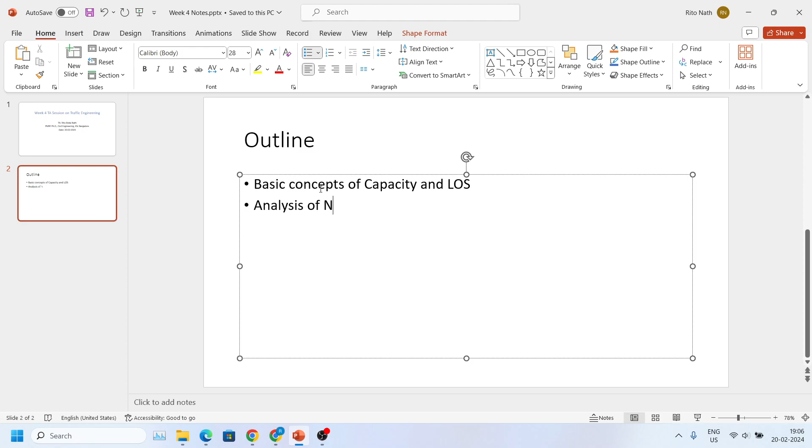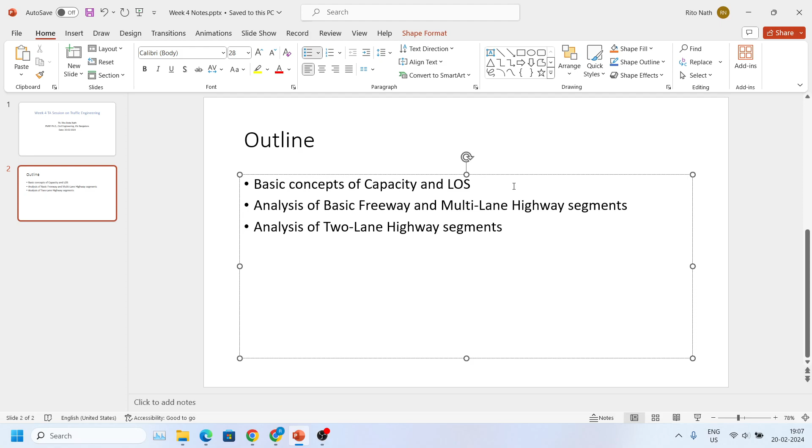First let me write down the outline of today's discussion, which is on capacity and level of service. Basic concepts of capacity and LOS, then what was discussed in class was analysis of basic freeway and multi-lane highway segments. Within that you have some speed flow relationships, operational and analysis applications - we'll see some of those. Finally, the analysis of two-lane highway segments, which was discussed very briefly, and the remaining discussion will be done in next week's sessions. So these are the basic topics I'll be discussing today.

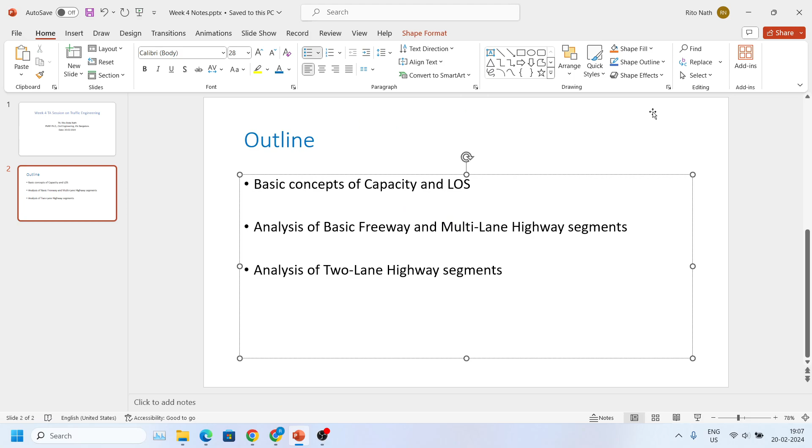Let's get started with the discussion on basic concepts of capacity and LOS. Now if I ask you this basic question: what do you mean by the term capacity analysis, which was discussed in the initial stages of the sessions shared on this website. Then you have something called level of service analysis. Let's try to see what these are and what their differences are.

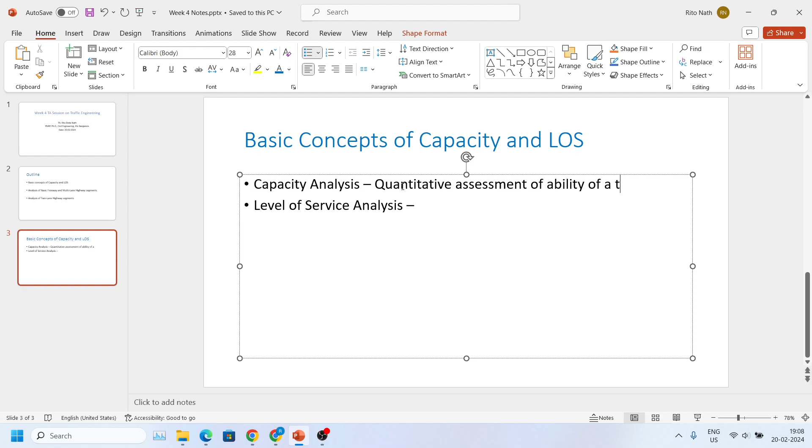Capacity analysis essentially means a quantitative assessment of the ability of a traffic facility to handle vehicles or people. Here we'll be looking at vehicles only, so it's in terms of vehicles in general.

And then you have something called level of service, which tries to tell you some performance level of a traffic system at various operating conditions. Now how good this operation of a traffic facility is, is what this LOS kind of tells you. So this is not a quantitative analysis, but it explains it through some qualitative analysis.

Now if I move into the discussion, just to understand the basic differences I've talked about here, this has been discussed in class as well. The traffic stream is composed of different modes, and different modes have different effects on the traffic stream. There can be cars, heavy trucks, light trucks, some recreational vehicles, buses, and pedestrians, bicycles, and so on.

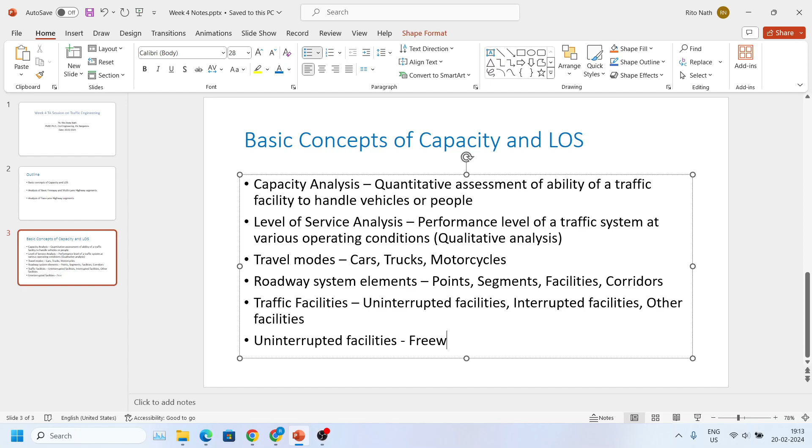Now the discussion in this week's lectures was on uninterrupted facilities, and these consist of freeways, which is basic freeways. Then you have multi-lane or two-lane highways as well.

Or you can have two-lane highways.

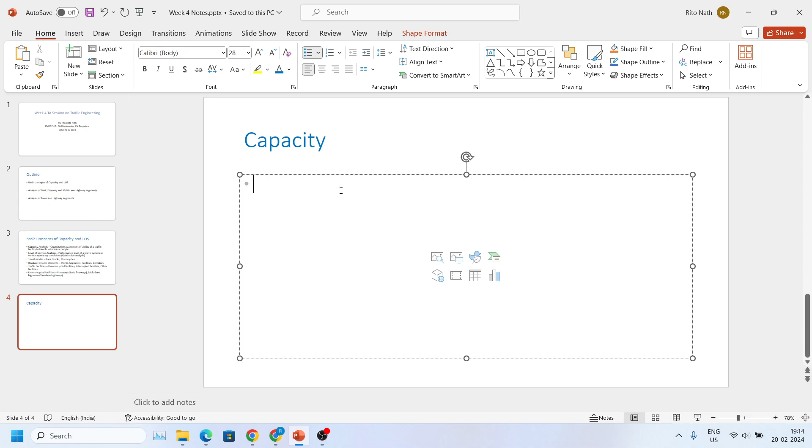Now the discussion was on capacity and mainly its definition. Capacity is defined as a maximum hourly rate, and the reason this maximum hourly rate is chosen, specifically the peak 15 minutes of flow, is because you have some steady or uniform situation on the road where you take care of all the heterogeneities in terms of travel modes and other things.

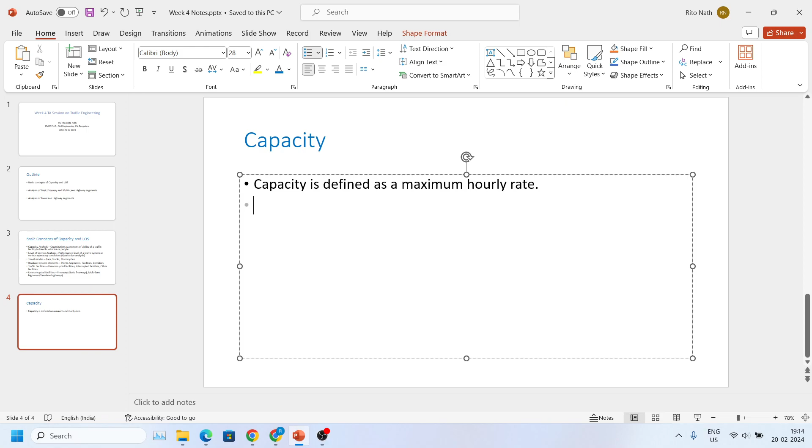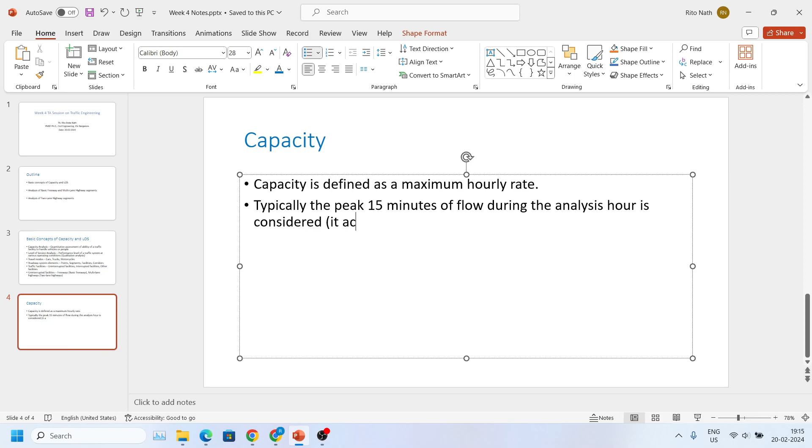So to define it, the peak 15 minutes of flow during the analysis hour is considered, and this peak 15-minute flow rate accommodates nearly all the variations in flow during the hour.

Capacity is expressed in terms of persons or vehicles. Person capacity is used in public transit systems and so on, but here the discussion is only on vehicles.

Another important pointer is that capacity is defined for a point or a uniform section, and this uniformity of the section being analyzed is an important criteria.

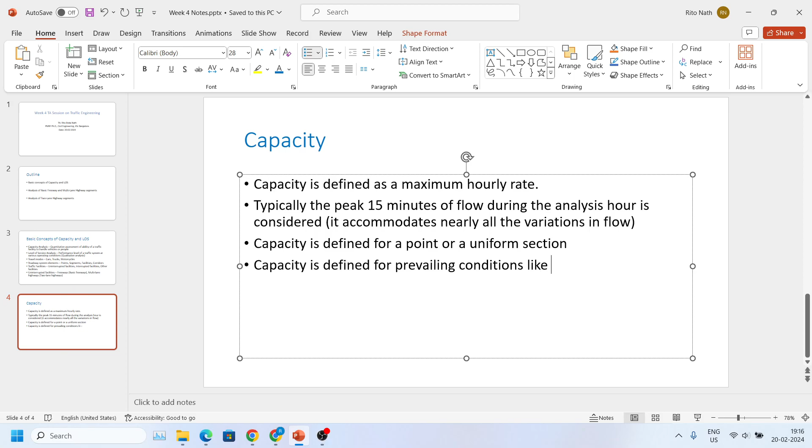Capacity is also defined for prevailing conditions like roadway, traffic, control operations, or environment, and we'll see what the base cases are and how adjustments are needed according to variations in these conditions.

Let's look at these conditions one by one. First, roadway conditions, which include the geometric and other elements, like number of lanes, lane widths, and design speed. There are many others, but let's just note these for now.

Then you have traffic conditions, which can be vehicle type, directional distribution or lane distribution, and driver population, like how familiar the drivers are with driving in those conditions.

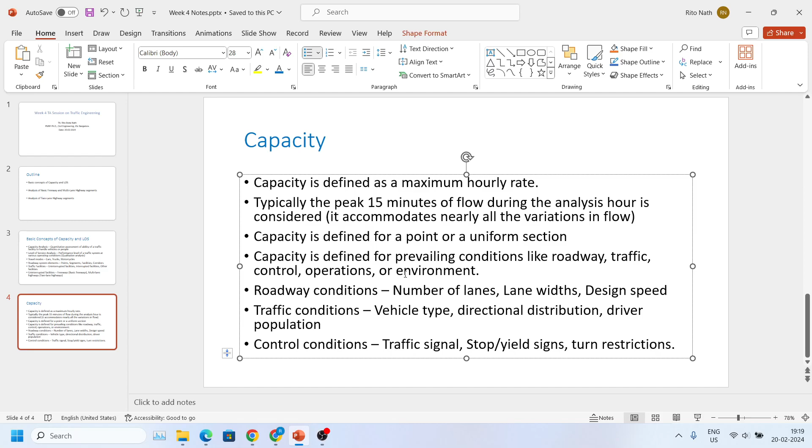The last one is environmental conditions - a traffic facility's capacity can be reduced depending on environmental factors like heavy precipitation, snowfall, lighting conditions, slippery road surfaces, and so on. But we will be only focused on the base conditions, so let's look at those now.

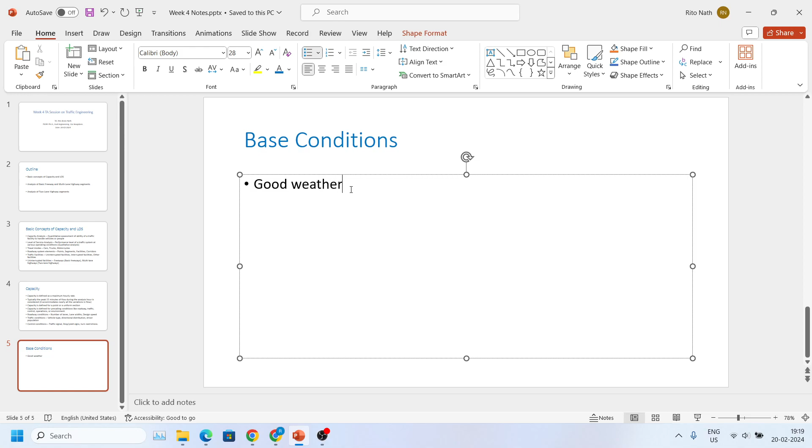In base conditions, we have good weather - precipitation and those things should not be present. Good and dry pavement condition, no slippery surfaces. Then users are familiar, based on the driver population I mentioned with the system element.

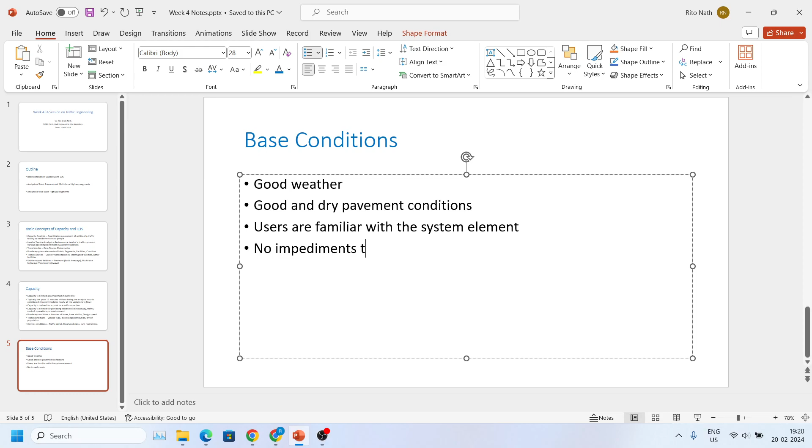And then there are no impediments to traffic flow conditions, like no slow moving trucks entering the traffic stream. And also no narrow lanes, like a 3-lane road merging to a 2-lane road - that's not allowed here.

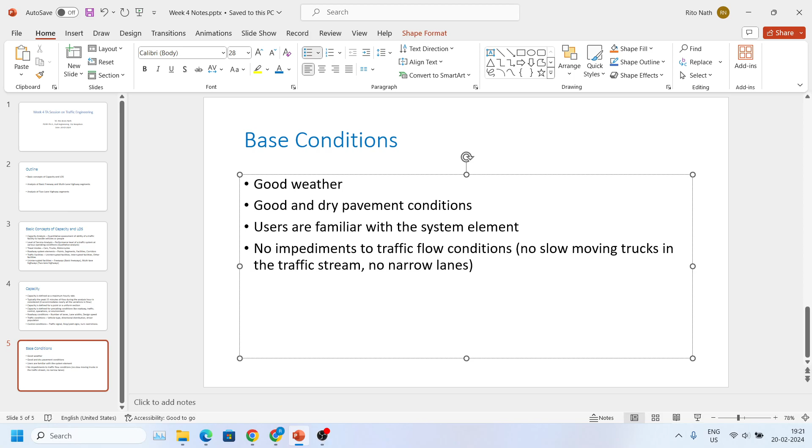In most capacity analysis, finding the roadway capacity, these prevailing conditions differ from the base conditions defined here, meaning you need some sort of adjustments. So prevailing conditions are different from base conditions in most cases, hence necessary adjustments are required to calculate capacity.

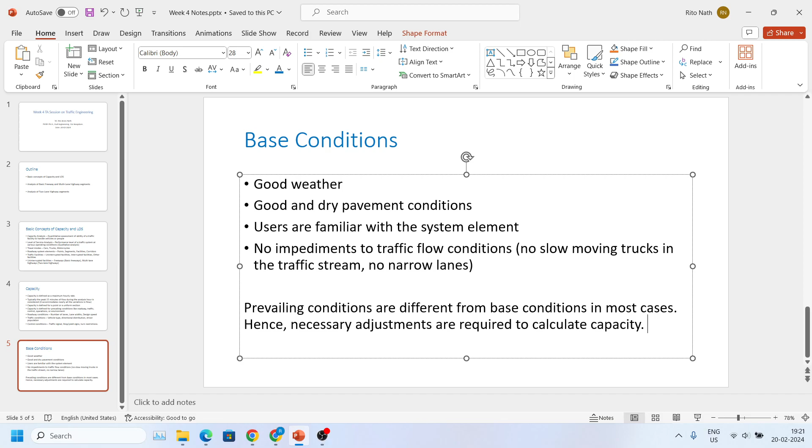Next, the discussion was on level of service, the basic concepts. So let's get into that.

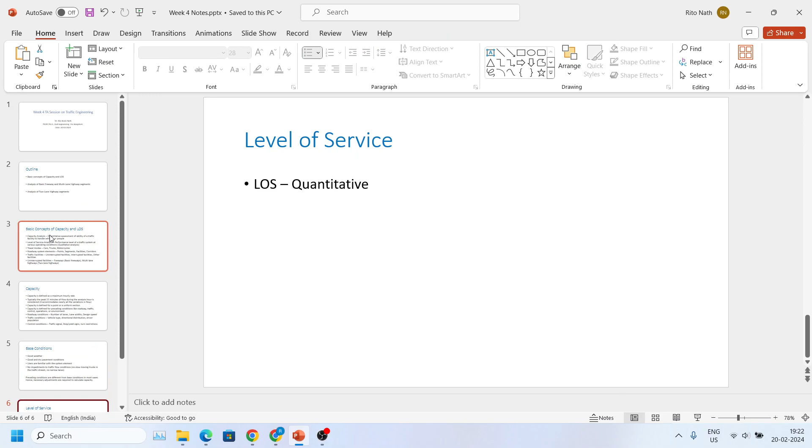So for level of service, I have already mentioned this LOS is a quantitative... I think I mentioned it as performance level. So this performance level is kind of some qualitative measure, but actually if you are doing it, you are quantifying something, suppose some density, speed and flows and so on. So actually it's wrong to say it as a qualitative analysis, it's also quantifying something. Let me just not write it here, and you can think of it as some quantitative analysis.

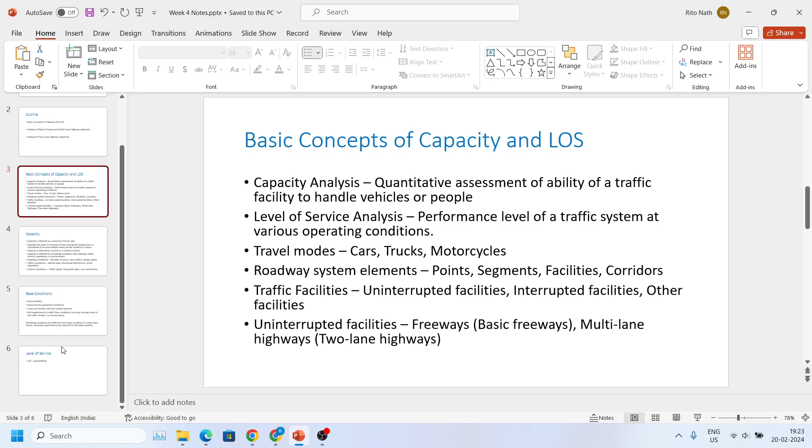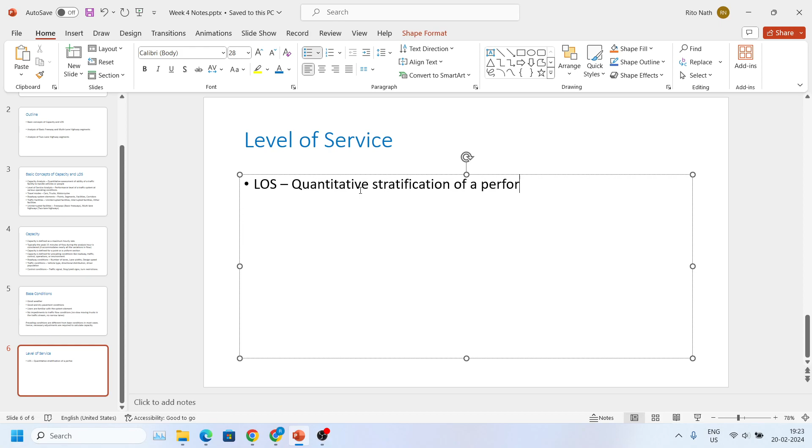So LOS is actually a quantitative stratification of a performance measure representing quality of service, and this quality of service term is some qualitative term you can think of, which tells you how well a traffic facility or service operates from the traveler's perspective. And the traveler's perspective can be different from one traveler to another, so that's why you cannot quantify it as such.

Now this LOS is typically given from level A, which is best, to level F, which is the worst. And this LOS for a given mode on a given transportation system element is defined by one or more kind of service measures. So we'll see what these measures are, but let's first see how you can define this quality of service.

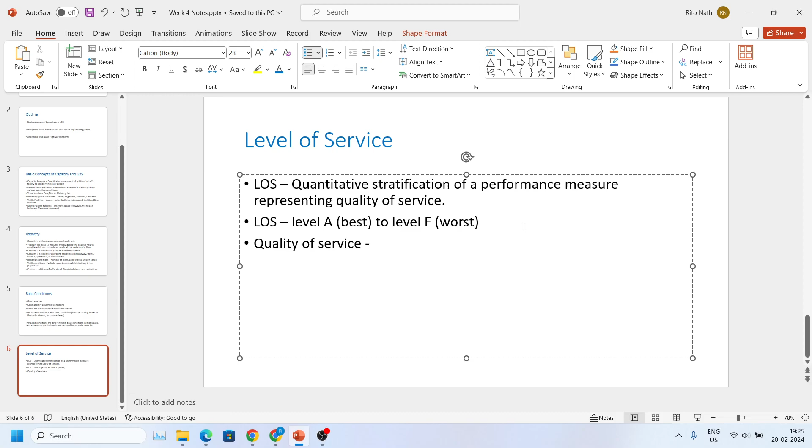So this quality of service is defined, as I mentioned, by how well this transportation facility is running. Now this can be assessed by some directly observing factors that are important to travelers, like speed, delay, tracking some complaints from the users, or you can survey travelers. Then you can forecast traveler satisfaction, and then you can observe some services not directly perceivable by travelers, some average incident clearance time, and speed and arrival time at work, those things. But I think if you just understand this first few points, that should be enough.

And now there are several factors that influence this quality of service: travel time, speed, delay, reliability, comfort, convenience, safety. So some basic stuff that travelers do care about. Cost, then accessibility to some facilities and so on. So these things, I think you should have some idea about how this quality of service is important.

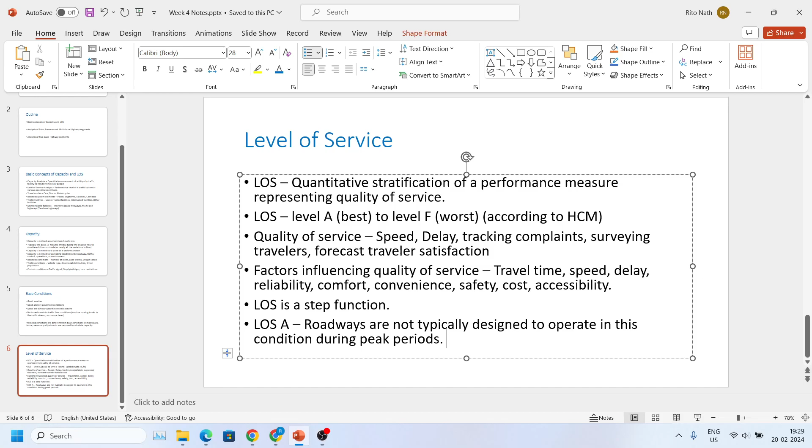And LOS F is, if you look at it, either a breakdown condition where demand exceeds capacity, or most users would consider the system to be unsatisfactory for some specified service measure. So LOS F represents this breakdown condition where demand exceeds capacity.

So now let me see what can be discussed. I think in this context there is some discussion on service measures. It is mentioned that each mode's travelers have different perspectives and could experience different conditions while traveling along a given roadway. So the service measures are also different for different modes and facilities, like for motorized vehicles, pedestrians might have different experiences, or bicycle users might have different experiences, as well as transit users.

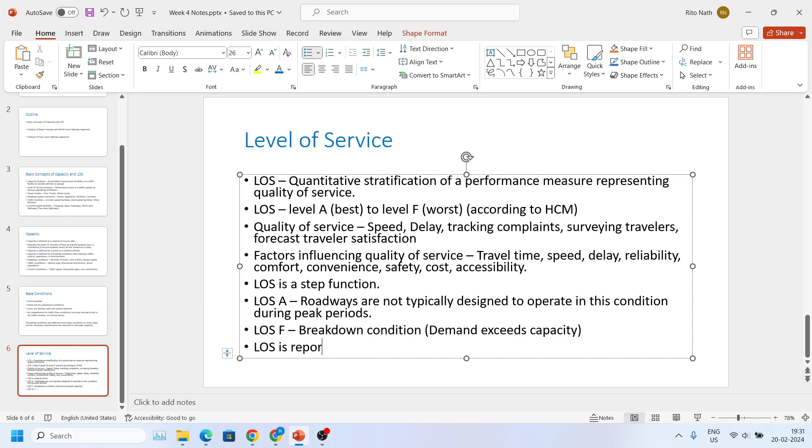So it depends. In theory, this LOS and everything should be reported separately for each mode for a given system element. So LOS is actually reported separately for each mode for a given system element.

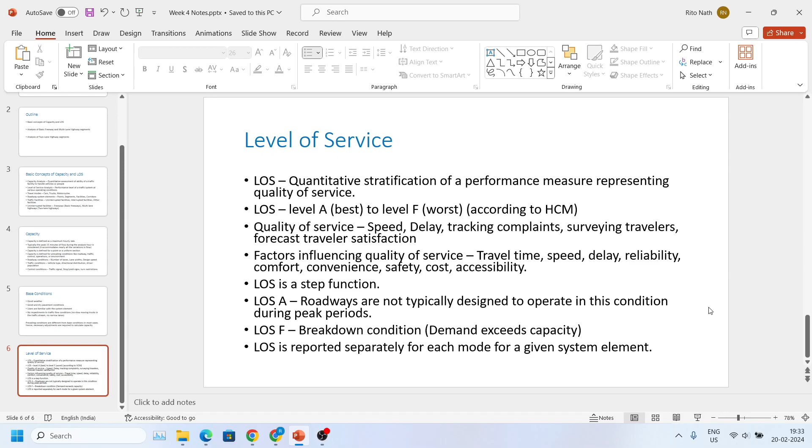So these are kind of basic concepts of this capacity and LOS. And I think then in the next module there were more discussions on prevailing and base conditions, some influencing factors, and so on, or a discussion on flow characteristics, like some pre-breakdown flow rate, post-breakdown flow rates, and those things. So let me quickly discuss those and then get into the quantitative analysis of this level of service. So the next discussion is, as I mentioned, we'll be looking at uninterrupted flow facilities as well as basic freeways and multi-lane highways. So let's get into that discussion.

Okay, so here we can distinguish between these two. Basic freeways are access controlled facilities. These have grade separated cross streets and ramp movements to access the facilities and so on.

Then you have multi-lane highways, which have some uninterrupted flow that kind of exists. There are no control devices, no platoons formed by upstream traffic signals. So these have no traffic control devices and no platoon forming.

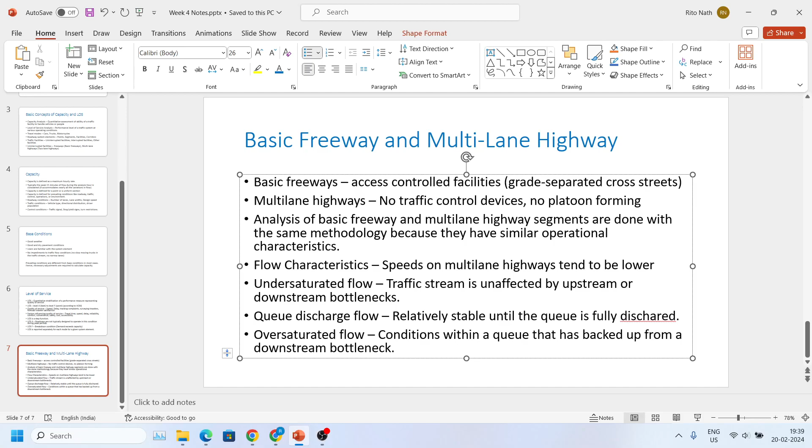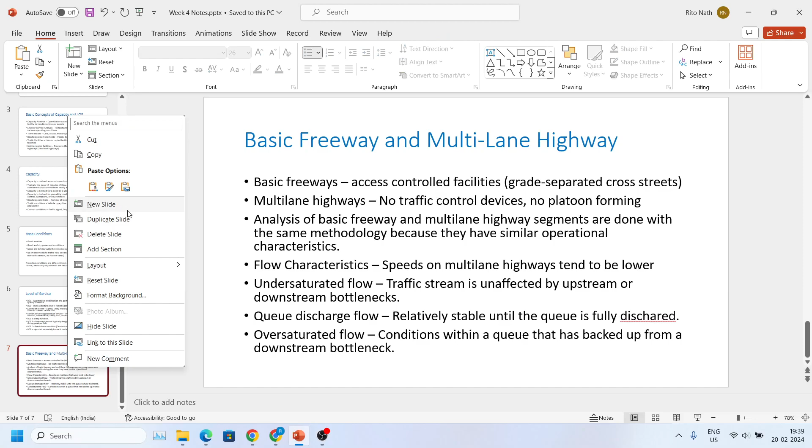Then there are some other terms that have been defined in the class. One is freeway breakdown. Let's quickly discuss those, and then I'll move on to the assignment questions. So this is on flow characteristics.

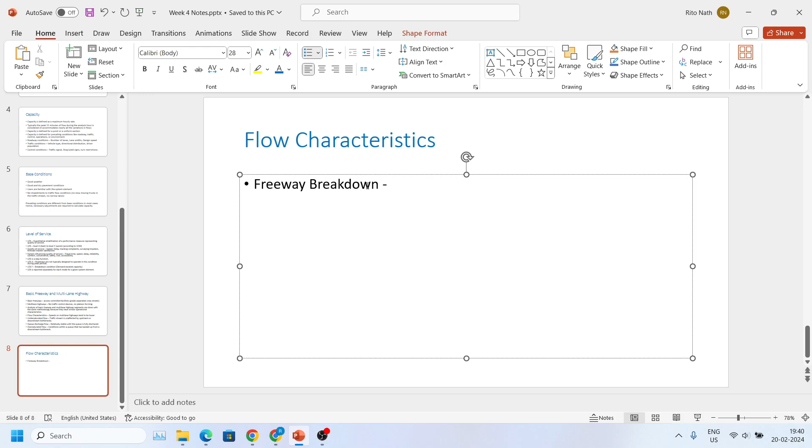One is called freeway breakdown. This describes the transition from uncongested to congested conditions. It tells you about formations of queue upstream of the bottleneck, and therefore the reduced prevailing speeds make the breakdown evident.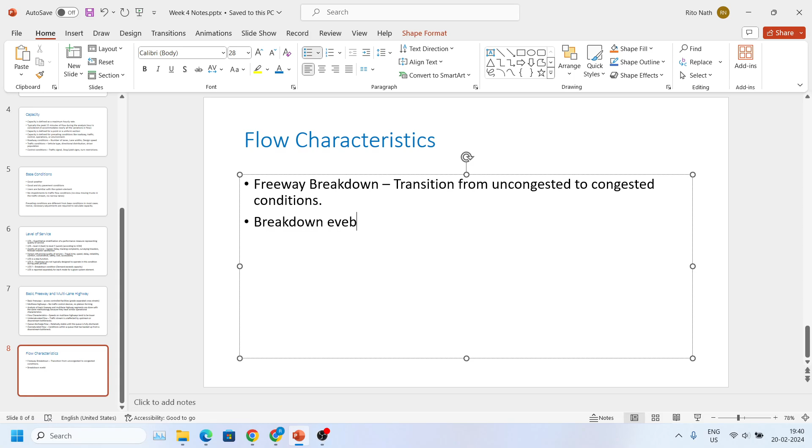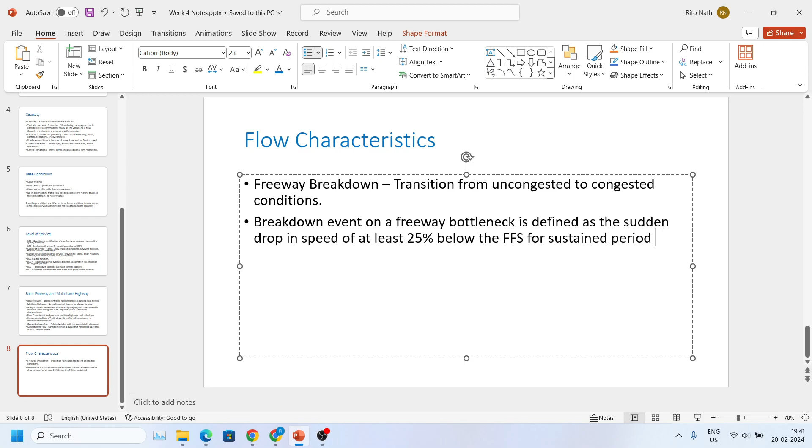Now there is one important term defined here. A breakdown event on a freeway bottleneck is defined as the sudden drop in speed of at least 25% below the free flowing speed, which I write as FFS, for a sustained period of at least 15 minutes, that results in queuing upstream of the bottleneck. This definition is according to the Highway Capacity Manual 2016.

Okay, so the next term defined is called recovery. So you had a breakdown condition. Now this recovery is actually the inverse of breakdown, and there is again one term defined as breakdown recovery on a freeway bottleneck.

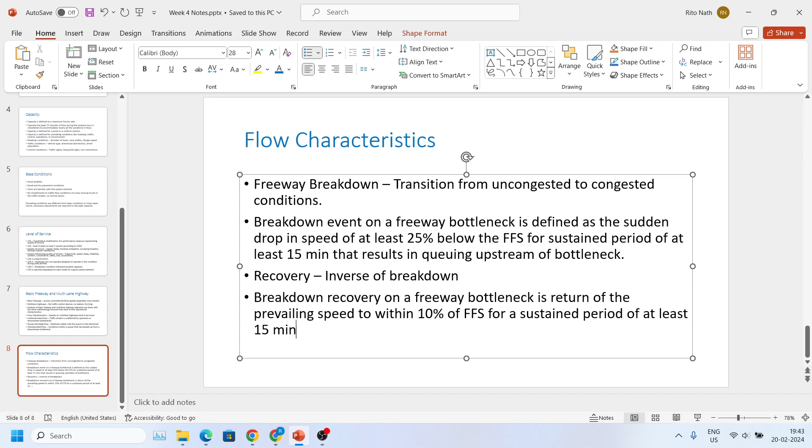It is the return of the prevailing speed to within 10% of free flow speed for, again, the same definition, a sustained period of at least 15 minutes, without the presence of queuing upstream of the bottleneck.

Okay, then there is something called pre-breakdown flow rate and post-breakdown flow rate. Let me just quickly write these terms and then I'll probably talk about it briefly.

So, pre-breakdown flow rate is the flow rate that immediately precedes the occurrence of a breakdown event, and this is expressed in terms of passenger car units per hour per lane.

And the post-breakdown flow rate can also be called the queue discharge flow rate or average discharge flow rate.

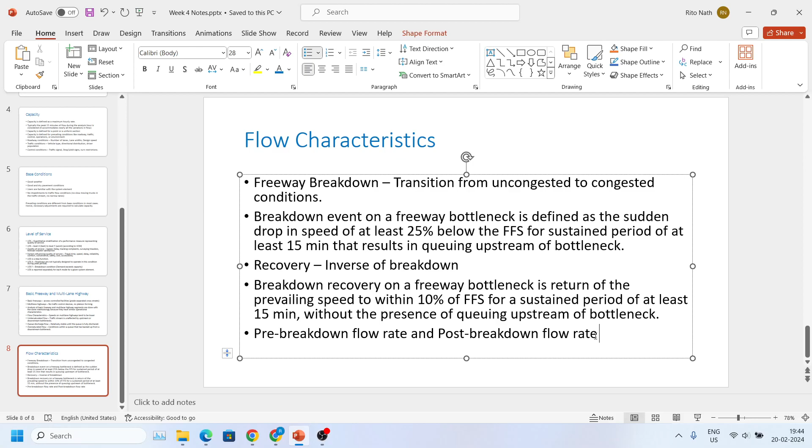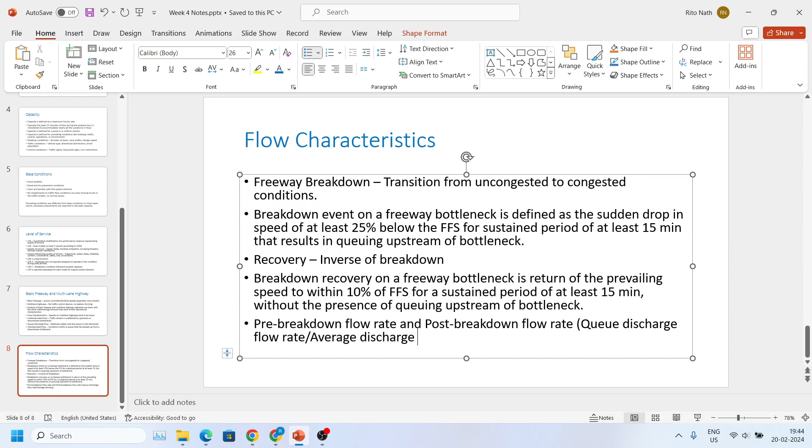This post-breakdown flow rate is usually lower than the pre-breakdown flow rate, resulting in significant loss of freeway throughput during congestion. The average flow rate during this oversaturated period, that is during the time interval after the breakdown and before recovery, indicates when the queue discharge flow rate is prevalent.

So now what we can do is get into the calculations of capacity under some base conditions, and then have some adjustments according to it. Let me check the slides.

Okay, I think now let's briefly get into some of the assignment discussion, and then I'll come back and go ahead with the remaining discussions, because now the main concept and theory part are done. It's mainly about the problems. Let me open the assignment and check what other questions are there.

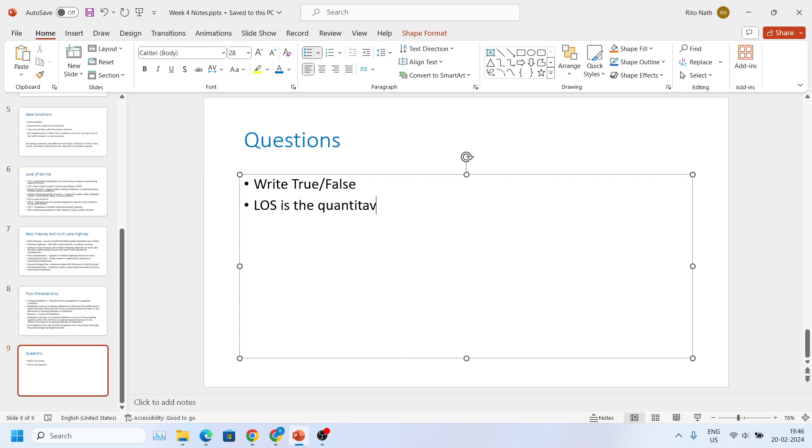So first, write true or false type questions. The first is: LOS is the quantitative stratification of a performance measure.

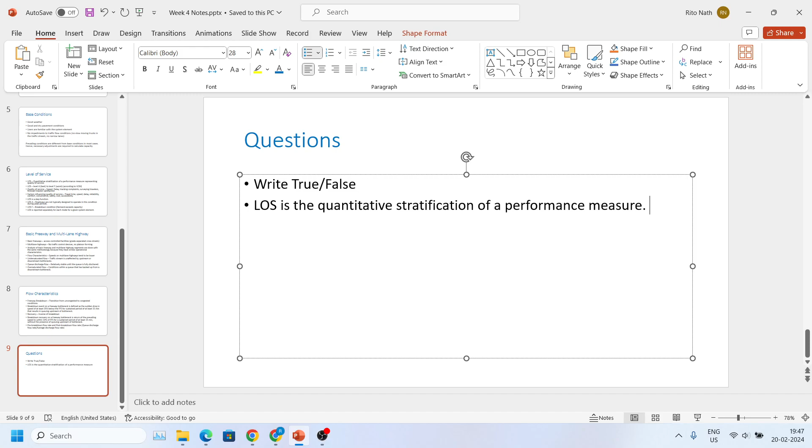Then you have: service measures are the same for all modes and road facilities.

Next is: LOS is a step function. Okay, let me see if there's anything relevant here.

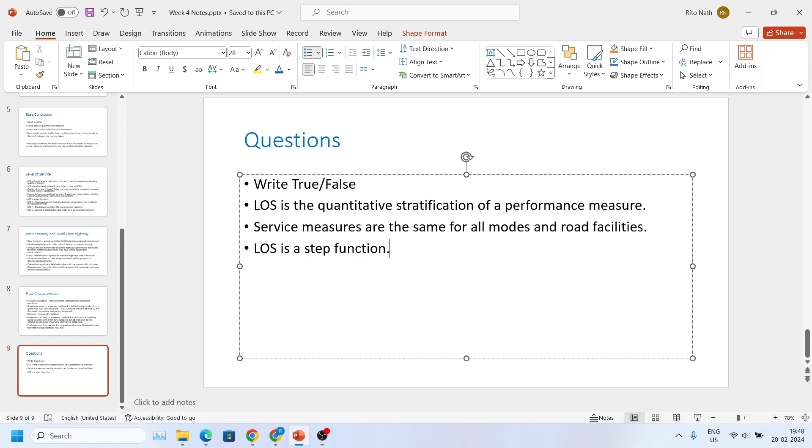Okay, next is: vehicle capacity is commonly used to evaluate public transit services, high occupancy vehicle lanes, and pedestrian facilities.

Okay, next is: roadways are always designed to provide LOS A during peak periods.

Another one could be: queue discharge flow rate is the same as post-breakdown flow rate.

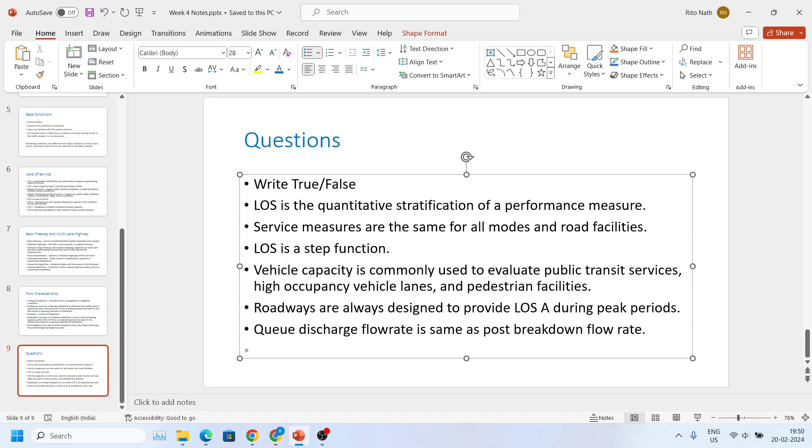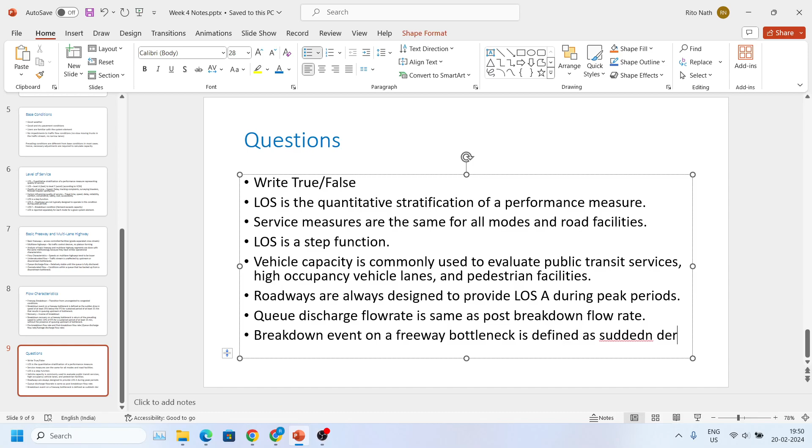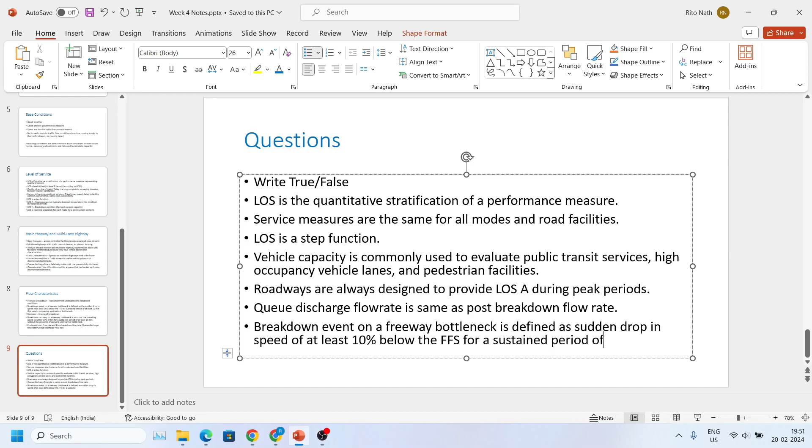Basic freeway and two lane - okay, let's not get into two lane right now. Let's talk about this one: breakdown event on a freeway bottleneck is defined as a sudden drop in speed of at least 10% below the free flow speed for a sustained period of at least 15 minutes. Okay, so this is A.

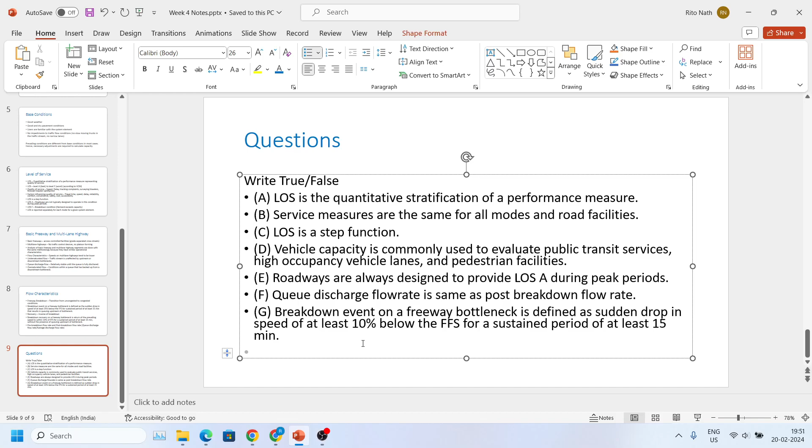Okay, so what should be the answers to these problems? You can type it in the chat if you want, because all of them have been discussed today in the class.

Okay, let me check. So, LOS is a quantitative stratification of a performance measure. Let's see if anyone answers. Let me flash this so I can have some answers, and then I'll be talking about all this.

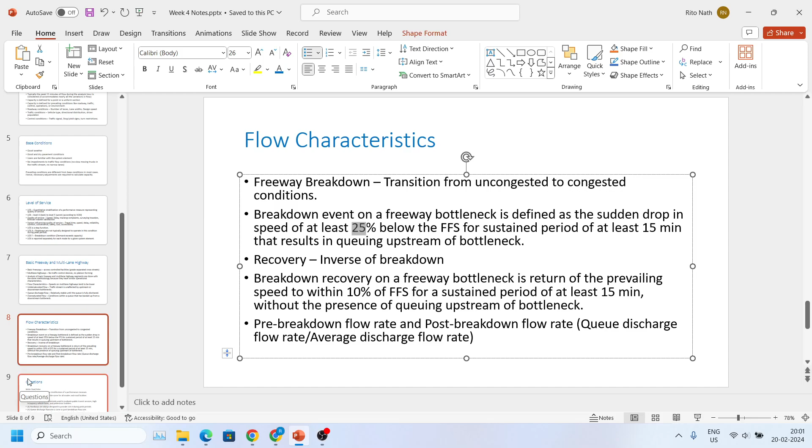This is the breakdown, so this is not to be confused with recovery. Breakdown recovery is another term which tells you the return of the prevailing speed to within 10%. But here we are talking about breakdown. So this is sudden drop in speed of at least 25% below the free flow speed. This is not 10%. So you have to check carefully which one is 10%, related to recovery, and which one is 25%, the breakdown. So this should again be false.

So yeah, many people did some mistakes, but I think this should be clear to you now. You should pay attention to these numbers and also check the slides. I think these questions are directly from the slides itself, so you'll get the answers there itself.

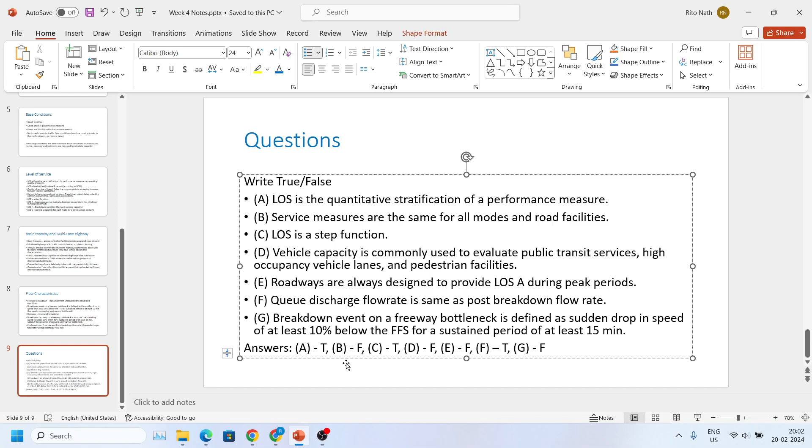So now let me move to another discussion on assignment problems. Yeah, so I think if I give it to you like this, maybe this is good that you are answering it, then I'll know exactly whether you are making mistakes or not. So it's a matching problem.

Okay, so I should do. Oh, sorry.

Okay, so let me write down the problem. So this is column, say, X, this is column Y. So you have to match within this, or I can just write numbers here. So suppose 1 is LOS A, then 2 is LOS B, 3 is, let me write it as LOS C, this as LOS E, and 4 as LOS F.

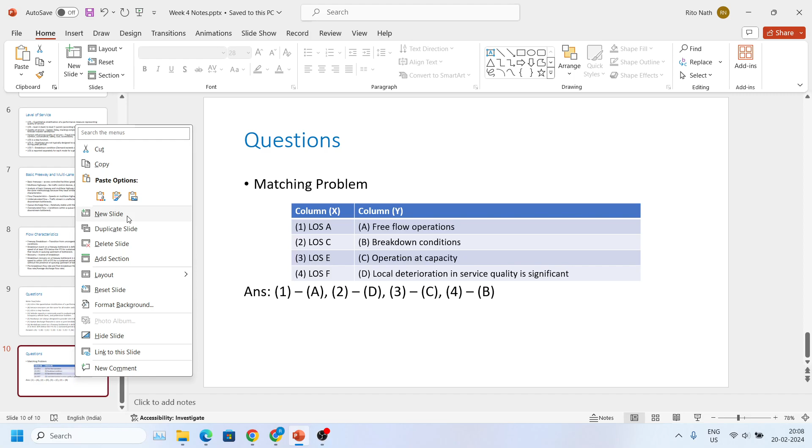Let's look at maybe one more problem in this nature and then move on to one numerical after that. Sorry, I wanted to add... let me delete it. Should be 4 columns. Okay, now it's fine.

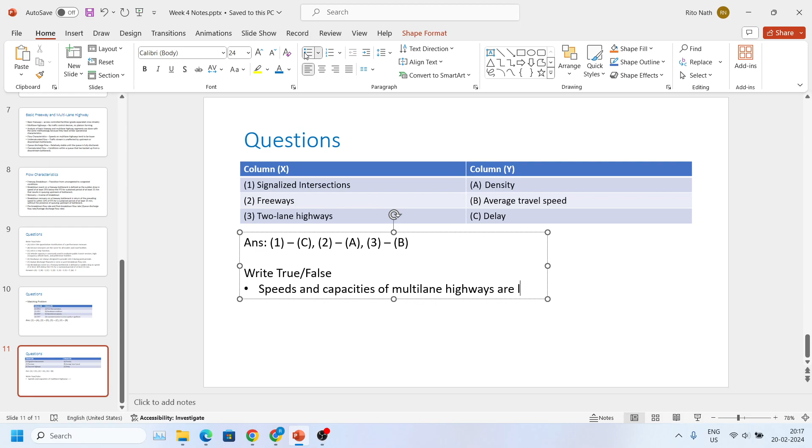So the first one is: speeds and capacities of multi-lane highways are lower than those on basic freeway segments with similar cross sections. That's one thing. Let me extend this.

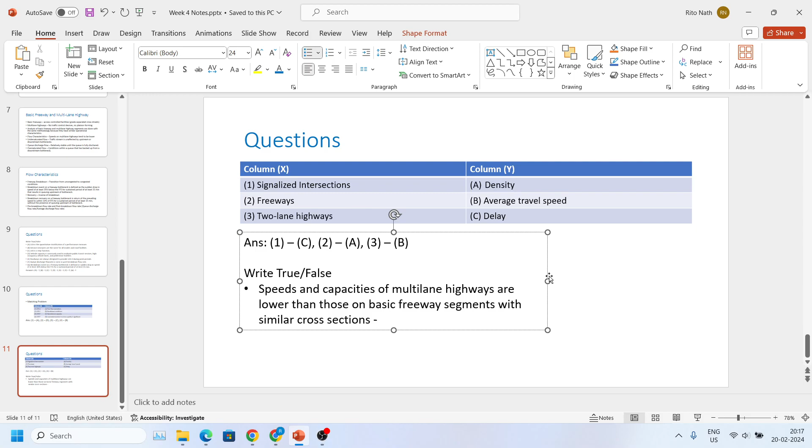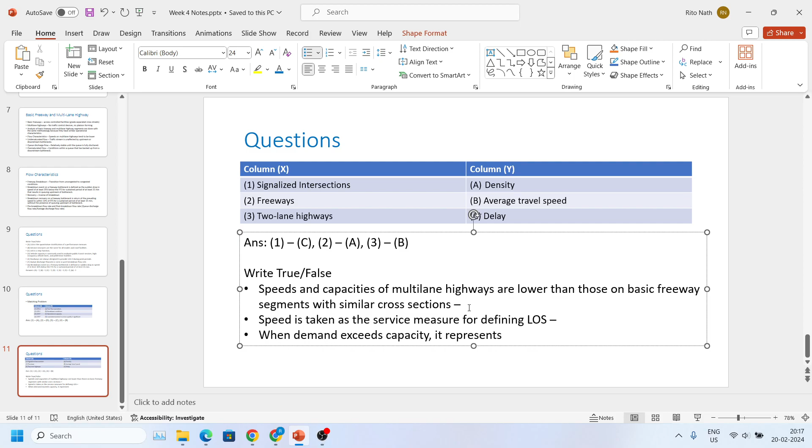Next is: speed is taken as the service measure. We just discussed this now for defining LOS. Then you have: when demand exceeds capacity, it represents the conditions of LOS E. Again, this has been discussed in another question.

And in speed flow curve of basic freeway segments under base conditions, breakpoint is constant for different free flow speeds. Okay, so what would be the answers to these problems?

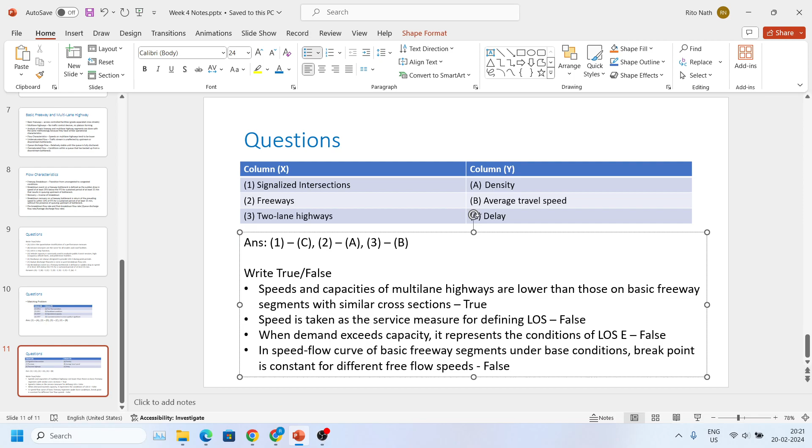So one is, let me give you the data. Yeah, go ahead. This one — which of the following statements are true? Yeah, yes, you can have, yes.

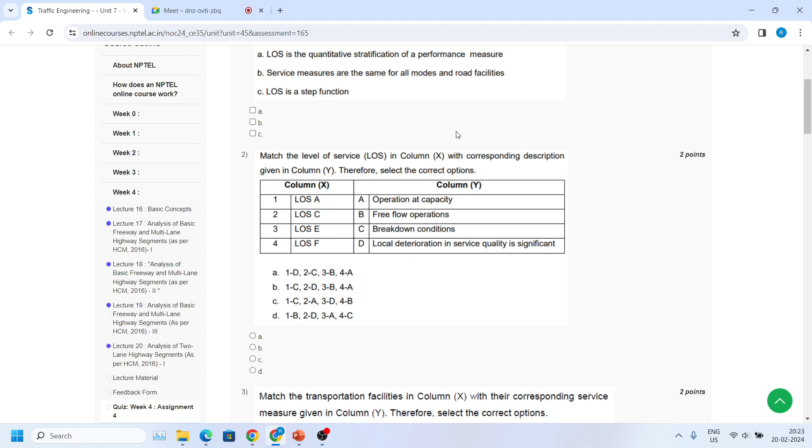Hmm. Oh. Oh. Hmm. Huh. Okay. Hmm.

Okay, so I think what I would suggest is you post this issue in the discussion forum. There will be an 'ask a question' thread there. Once you do that, the instructor should take a look at it and probably resolve this issue, because I don't know how it goes. It's an issue from the NPTEL team's side, I think.

Yeah, for me, suppose I select A and B, it's fine, right? I'm able to do it. It's not locked. Okay, this...

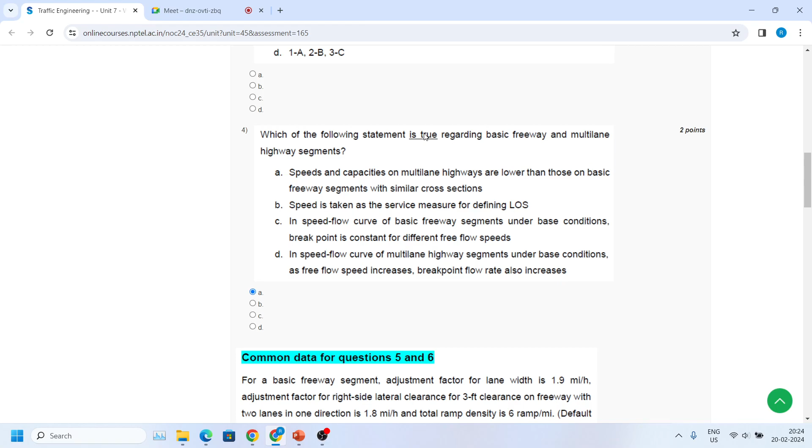Okay, so in general, I'm not sure. Maybe here you have only one statement which is true. It's written 'is true,' not 'which of the following statements are true.' But anyway, the assignment answers are released for the previous weeks. If there were such issues where you saw multiple answers but got partial marking for that, you can raise that issue in the discussion forum, and they will resolve it, I think.

Yeah, okay, any more doubts? Otherwise, I'll move to the numerical.

Okay, so let me give you the data for this. So this is a basic freeway segment that we are talking about. And then we have adjustment factor for lane width. These adjustment factors and all have been discussed in the class.

For lane width, it is given as 1.9 miles per hour. Then you have adjustment factor for right side lateral clearance for 3 feet clearance on a freeway with 2 lanes in one direction. This is 1.8, and finally you have this total ramp density equals 6 ramps per mile.

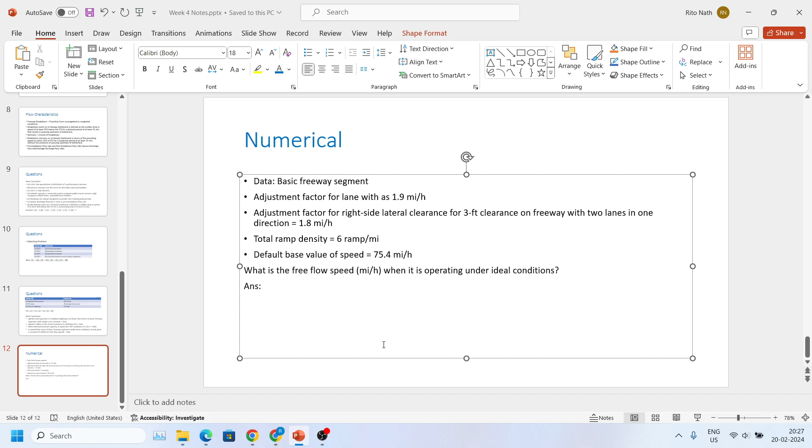So I'll just reduce the font size a bit. Now in the lectures, I think you had one formula which was given as: free flow speed equals base free flow speed minus f of LW minus f of RLC minus... let me check the expression once. Yeah, 3.22 times TRD, and then you have an exponent which is 0.84.

So here BFFS is the base FFS, which is the free flow speed for basic highway segment, which is given here. FLW tells you the FFS adjustment factor for lane width.

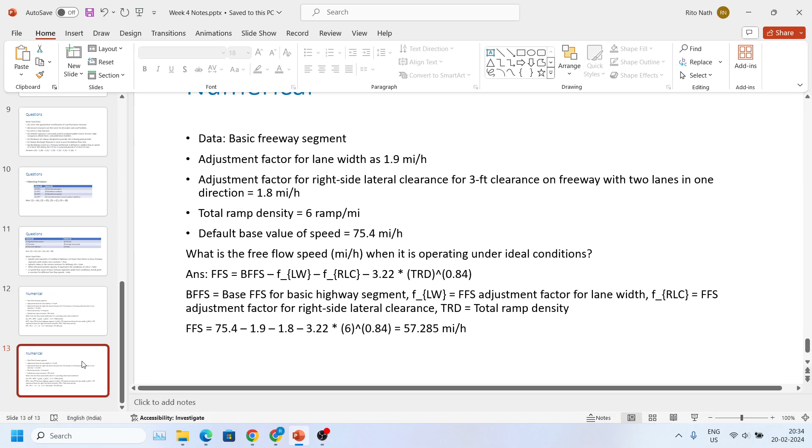Now there is another problem with the same data. So let me just copy this and write a new problem, which is: calculate the base capacity of the freeway segment. So this is in passenger cars per hour per lane. Okay, so for this again you have a formula that was given in the slides.

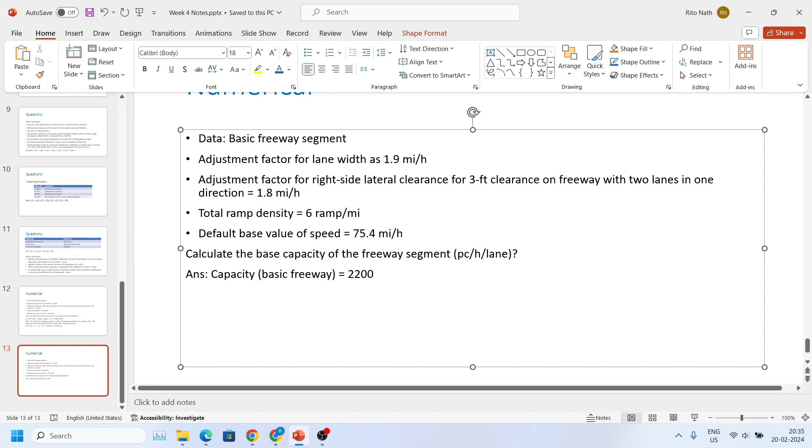So let me quickly check what the expression was. So for free flow speeds we have made the adjustments. For capacity there was another expression. So this is capacity, for basic freeway that we are looking at. This equals 2200 plus 10 times FFS adjusted minus 50.

Now we already know what FFS adjusted is. So this is plus 10... yeah, here it is a standard value. It won't change here. That's correct.

In case of any confusion, you can check Highway Capacity Manual 2016. There you will find this standard value specifically for basic freeway, but expressions will change if we are using multi-lane freeways.

This expression is also valid when you have your base capacity, which shouldn't exceed 2400. Let me work it out and see what's the final value here.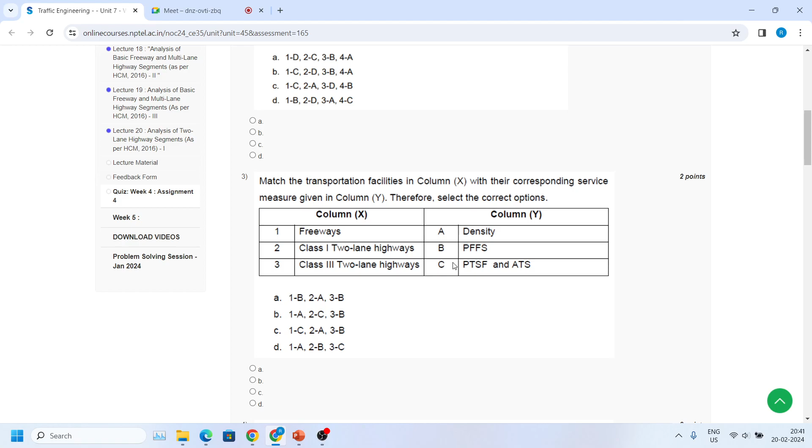But let's look at this other example on multi-lane highway. Let me just check if there's anything I missed. Someone was talking about class 1 two-lane highways and class 3 two-lane highways. I think you can answer these, that's not a problem. Here also there should be one correct answer, but I have to check.

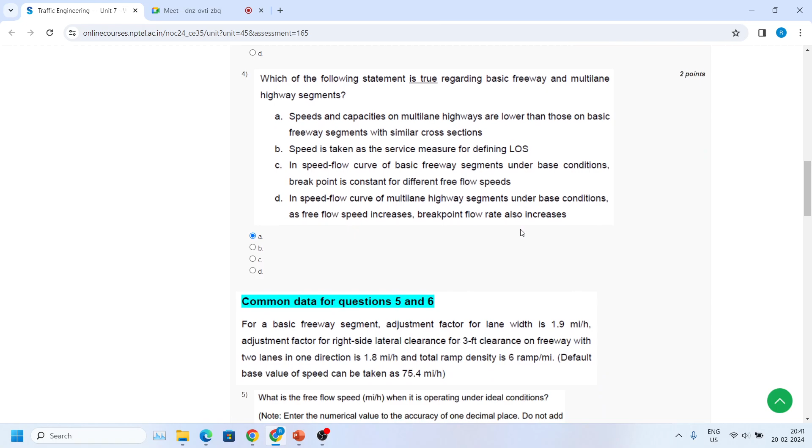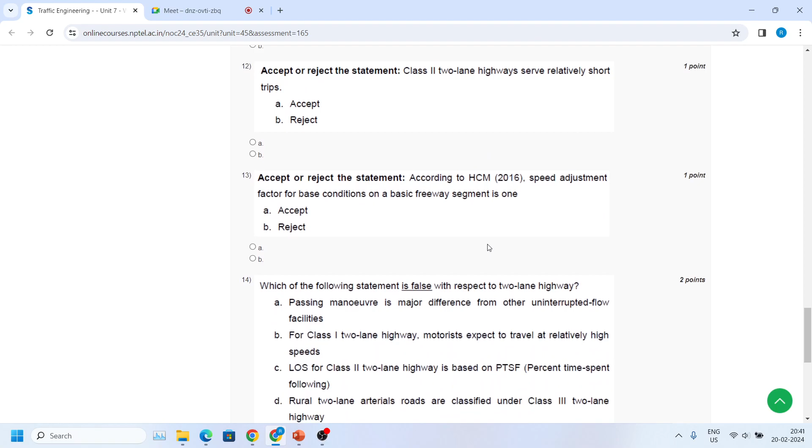Okay, so this I already discussed, these are discussed. I think you can answer these as well, not a problem. This is related to two-lane highways.

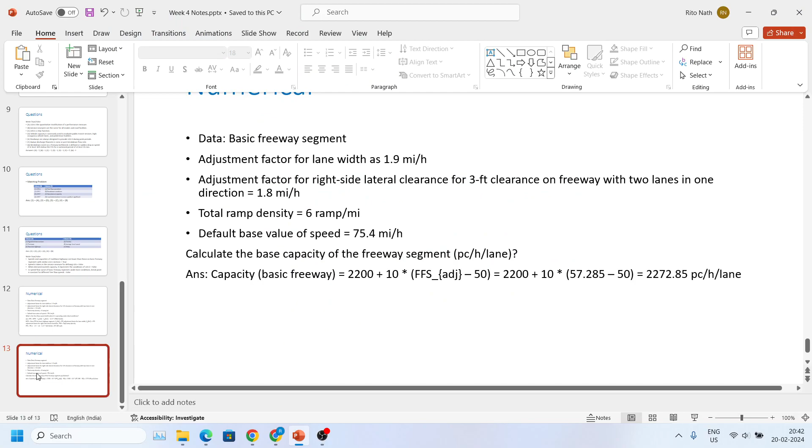Let's solve one more numerical. Let me give you the data. So this is on a multi-lane highway, you have a 5-lane highway. By 5-lane, it is meant two travel lanes in each direction plus a two-way left turn lane. And you have the characteristics as...

Then you have base, is it different? Okay, yeah. So next is lateral clearance on both sides of roadway, 10 feet. Instead of 12 feet, let me keep it as 11 feet.

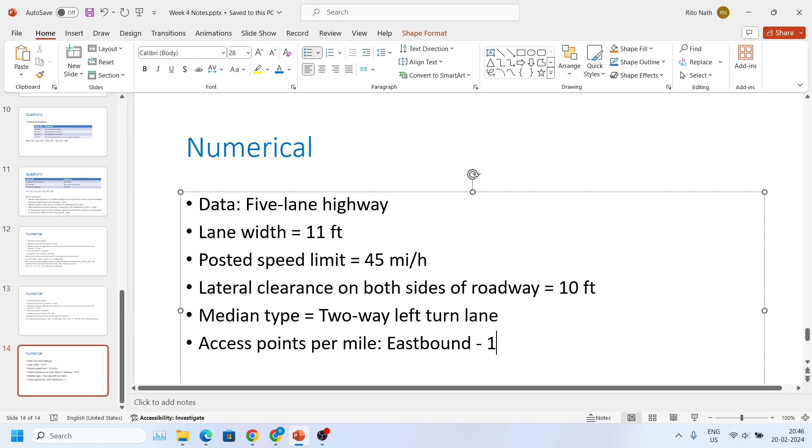Then you have additional information on median here: two-way left turn lane. In addition to this, you have information on access point density. So you have eastbound equals 10, and westbound equals 0.

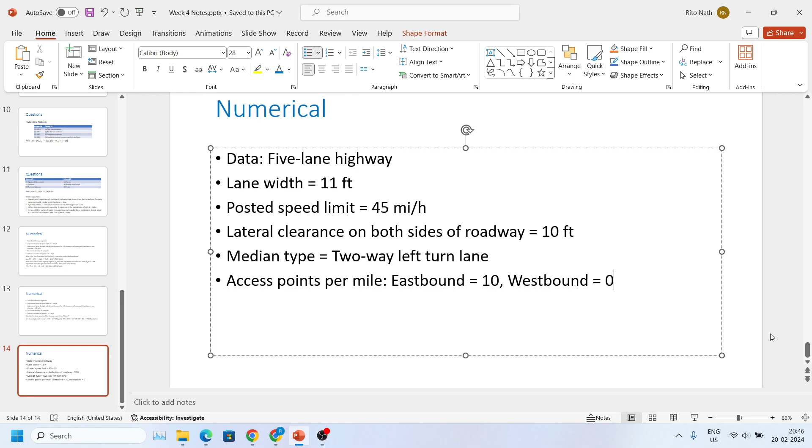So now I'll ask you, what is the adjusted free flow speed? In order to solve this problem, we have sufficient data. Now how to use this is the challenge. First we have to see what the formula is to calculate this free flow speed in multi-lane highways.

The formula is again similar but with slight differences. You have the base free flow speed, then based on lane width you have an adjustment factor, then total lateral clearance with its adjustment factor, an adjustment factor based on median, and finally another with respect to access points. Now let's check what the values are.

This base FFS, or BFFS, is considered as the posted speed limit given here plus 7 - that's the standard norm given in HCM. So this you can calculate, this is 52 miles per hour.

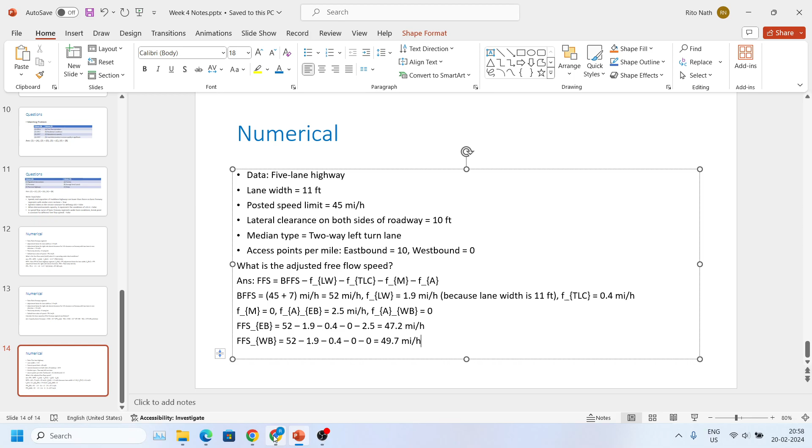Yeah, it is true because in multi-lane highways, you have to check for traffic coming from the opposite direction, and based on that overtaking, the safe gap measurements and all those things come into picture. So the speeds are actually not that high compared to a basic freeway which is grade separated. So this statement is true.